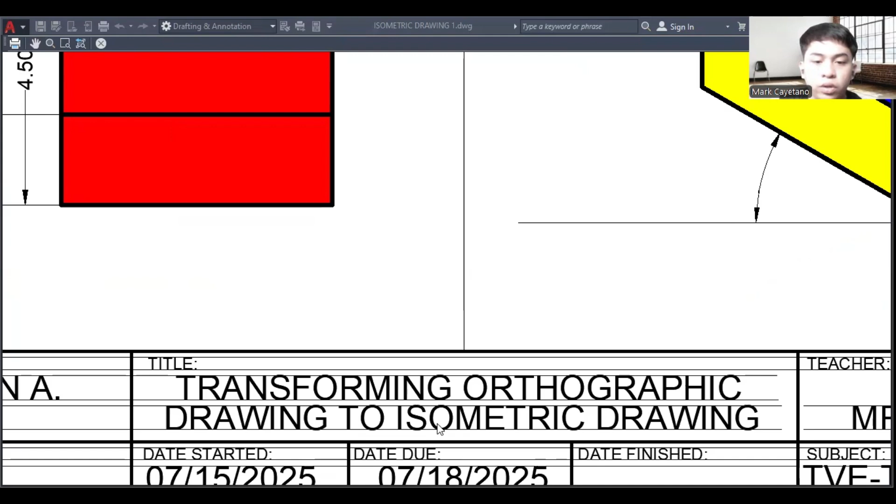For our next plate, we will try to transform an orthographic drawing into an isometric drawing. On the left side, this is the orthographic drawing. We have the top view, front view, and right side view of the object. Now let's start with the title block.

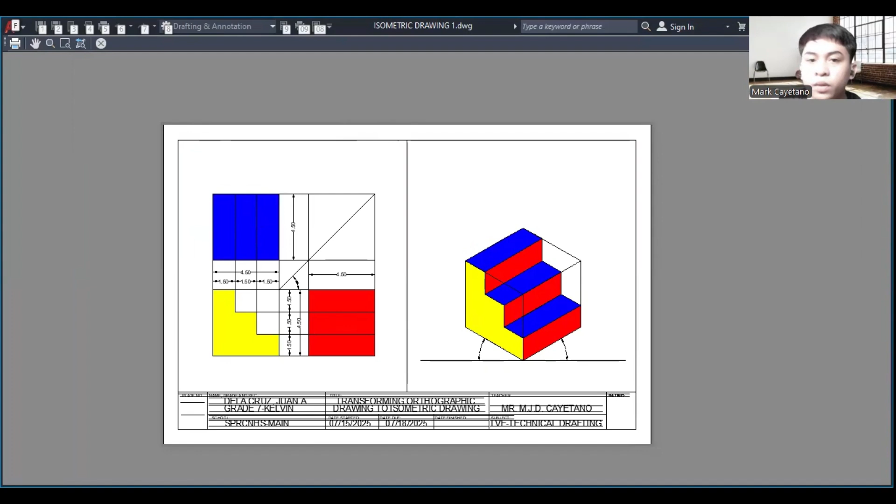For the title block, same standard. We have the borderline, and then the name at the bottom, complete with details. Then we will divide our drawing paper into two. On the left side, this is our orthographic drawing, and on the right side, this is the space for our isometric drawing.

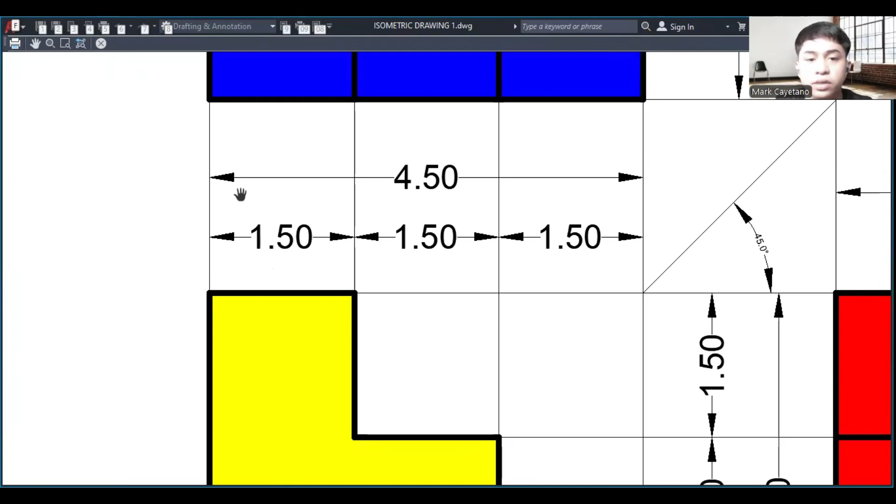The miter line is always 45 degrees because we use third angle projection for the orthographic drawing. That's why we have a miter line here.

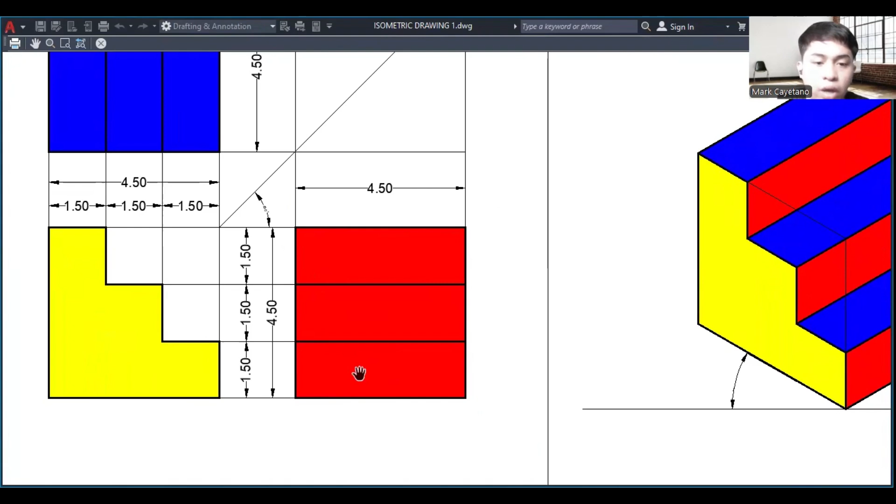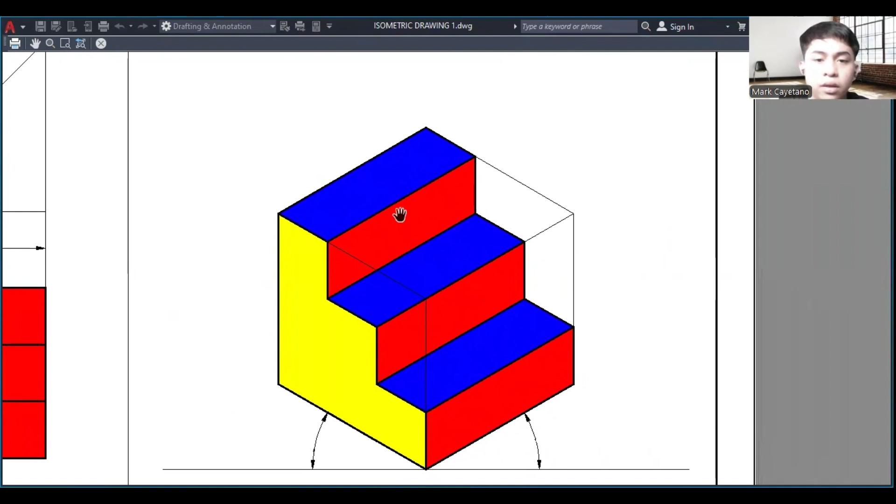Next, we have the right side view. The right side view is on the right, meaning when we transform it to the other side, whatever its color is, we can easily identify it. For example, the front view — this will be our front view, colored yellow. When we say top view, those three lines, the same applies — we'll just interpret the position of the object, especially the face of the object.

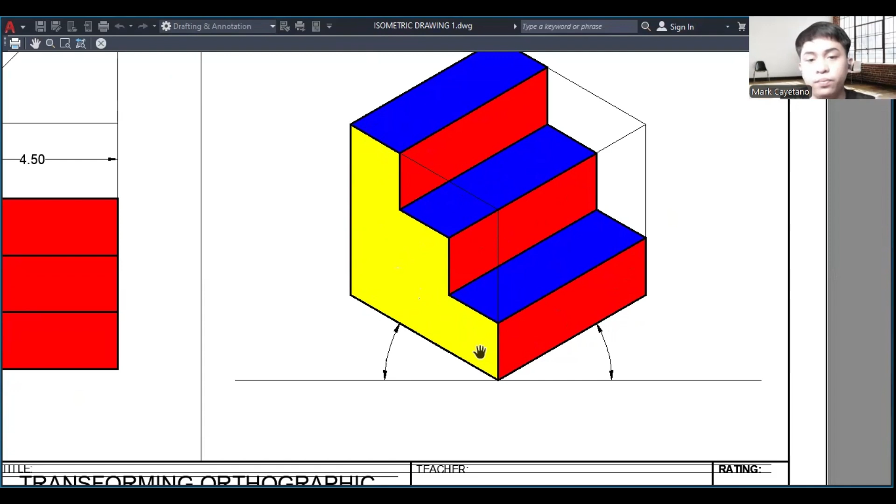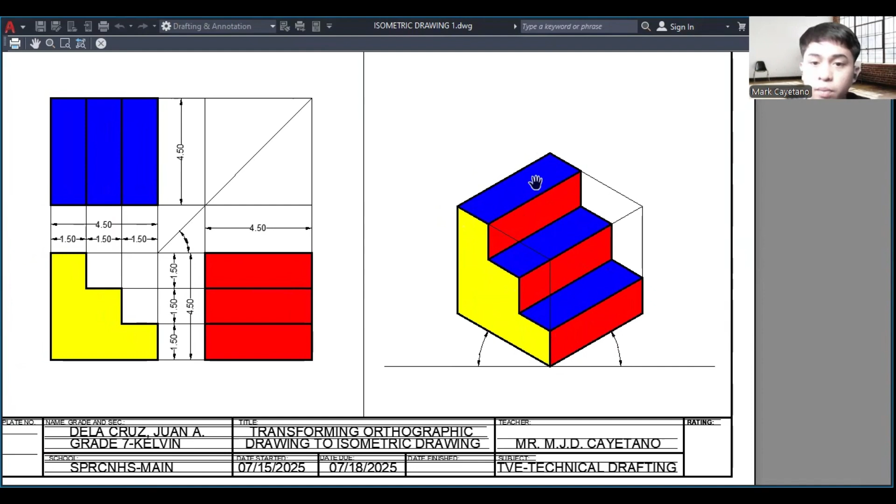If we want to project the three views of our object, the most cardinal views, we use isometric drawing. In isometric drawing, it shows or represents the three-dimensional view of an object. We can see the length, the width, and even the height of the object.

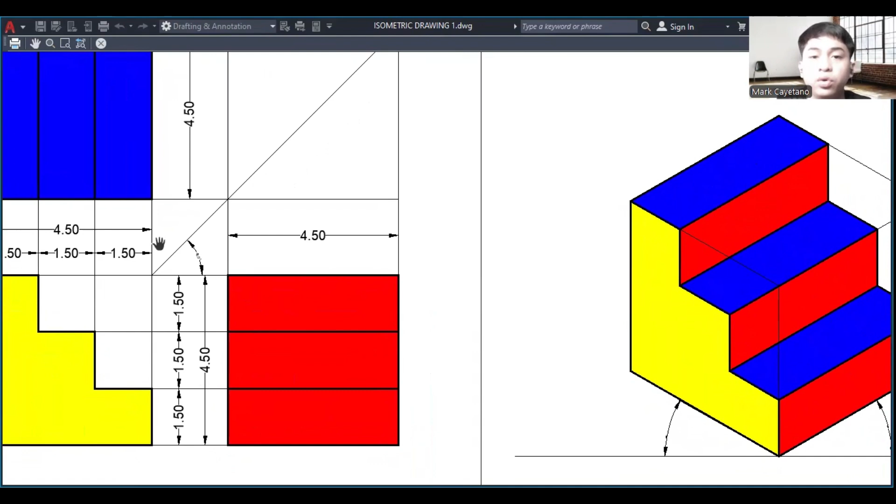We also use the orthographic drawing to produce the isometric drawing. This will always be the basis of our isometric drawing — the orthographic drawing. Because in the orthographic drawing, aside from having measurements, it contains the details, the length, the width, and the height of the object. We just follow the dimensions and transform it into an isometric drawing.

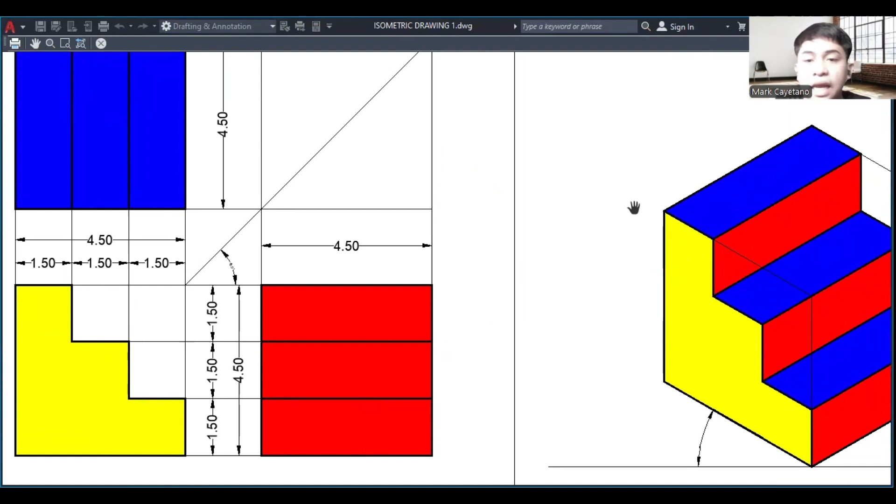So, do not forget to label our drawing. This is the orthographic drawing, label it at the bottom. On the other side, this is the isometric drawing. If you want to color your drawing, much better, so that at least we know where the front view is, where the top view is, and even the right side view of our drawing.